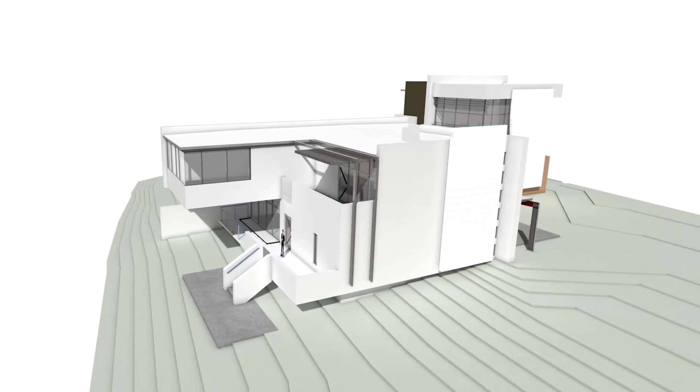In 2017, we've added even more great capabilities to really make rendering indispensable to your design workflow. In Vectorworks 2017, you now have the ability to import textures from Cinema 4D. This allows you to increase your Vectorworks library content by importing textures that you've created in Cinema 4D, or by using textures from libraries that you've purchased or found online. All you need is a Cinema 4D file containing the textures.

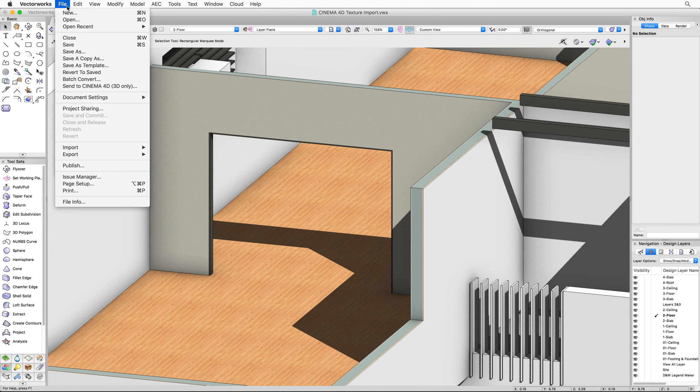We can import the C4D file into our Vectorworks drawing by clicking File, Import, Import Cinema 4D Textures. Just choose the C4D file and click Open. The textures from the file will be imported into your current document so you can access them through the Resource Manager.

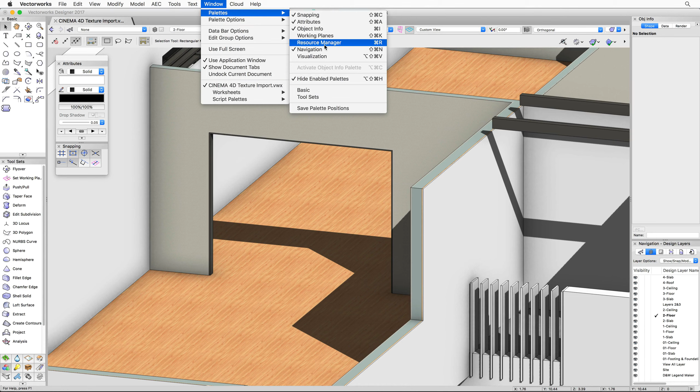To help you keep your resources organized, we've created a folder in the Resource Manager that contains the imported textures. The folder will have the same name as the C4D file. Open the folder up and take a look at its contents. The textures can be modified just like a texture that was created in Vectorworks.

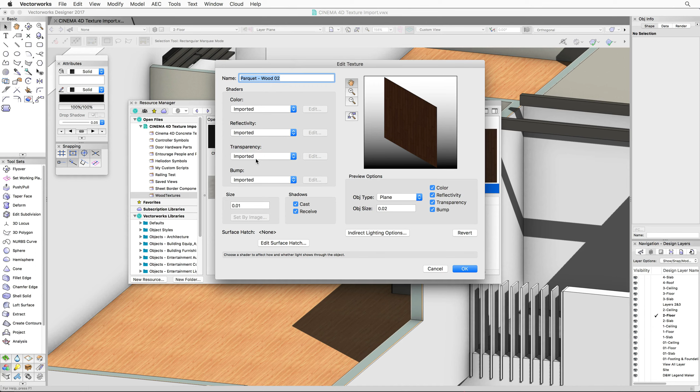For this reason, the imported shaders can't be directly modified in Vectorworks, but they can be easily overridden. For instance, you may like the bump shader but want to change reflectivity of the imported wood texture. Click on the reflectivity shader pop-up and choose glass.

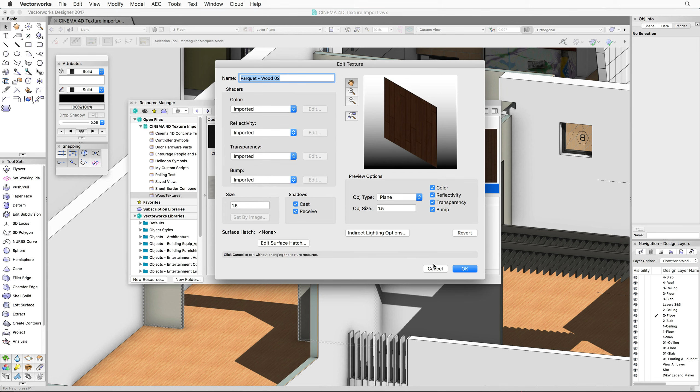This will add the glass reflectivity you want, but the remaining shaders will still use the imported settings. You can always revert back to the imported shader settings by clicking on the pop-up menu and choosing Imported. The texture will behave the same as a native Vectorworks texture. They can be scaled and mapped appropriately on the applied object.